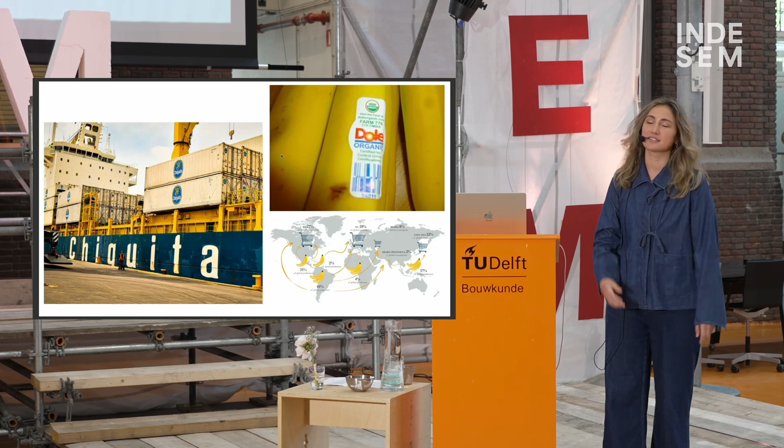Do you agree with me that it's better to buy local food? Yes? Why? Can you throw out some ideas why you would buy a fruit that is in season and grown locally rather than bananas that fly in or are on a ship from the other side of the world? Logistics? Yes. Reduce transport? Yes. That could be. What? Local labor and supporting the local economy? Very good. So I completely agree with you guys.

Then why don't we do the same with construction materials? Why, when we go to Brico to buy a paint for a room, we never think about where it's coming from, or there's no tag, there's no nutritional properties, let's say, as we would find on food to know what's inside, and we actually have no clue where it's coming from. So this is exactly the kind of questions that I was asking myself when I was studying here. And this is what we reflect a lot on at BC.

So what is BC? It stands for Brussels Cooperation, and it's actually a hybrid company made out of 3 different companies. So we have BC Materials, which is a workers' cooperative. It's literally a company that produces construction site materials and sells them on the market. Then we have BC Studies, which is a non-profit research laboratory.

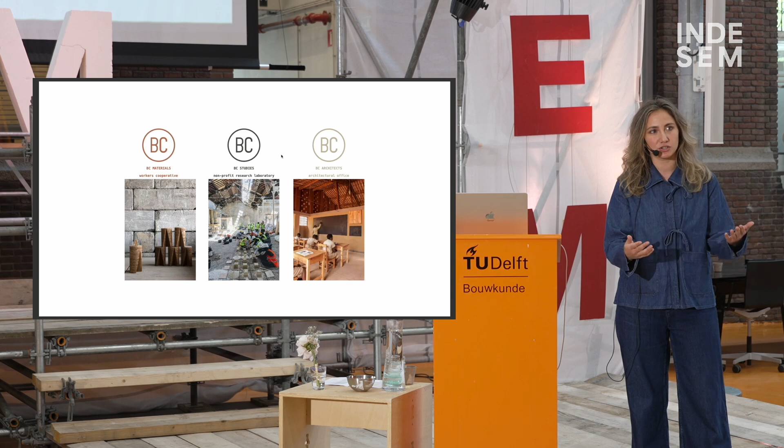I'm actually here today with BC Studies, let's call it, because I'm doing education or workshops regarding the world of earth construction. And then we have BC Architects, which is a proper architectural office. We all work in the same space, we all work together, but they have very distinct objectives.

How did BC start? So 4 co-founders in Brussels at KU Leuven got a commission from someone that they knew to build a school in Muyinga in Burundi. You probably have seen this project before. They actually traveled there, they didn't have a job, and they started checking out what was possible with the resources that were there, because the budget was quite low, and they needed to produce the materials right there on site and couldn't afford to import anything from abroad.

So they started doing a lot of research and actually understood that most things over there are built with mud. They started testing it, reading online, reading books about how to transform this resource to build. And I'm going to show you guys a video that explains a bit that process.

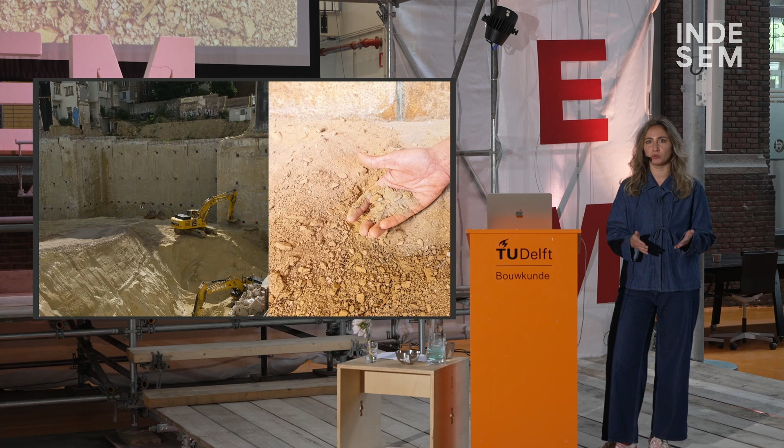And so they started thinking, since we've had this experience in Burundi with transforming the resources into construction materials, why can we not do it in Brussels too, in Europe too? So basically, this is the main idea around which BC Materials is born. It's just to take earth that is already excavated from construction sites. To give you an idea, there's 37 million tons of excavated earth that is thrown away in Belgium every single year.

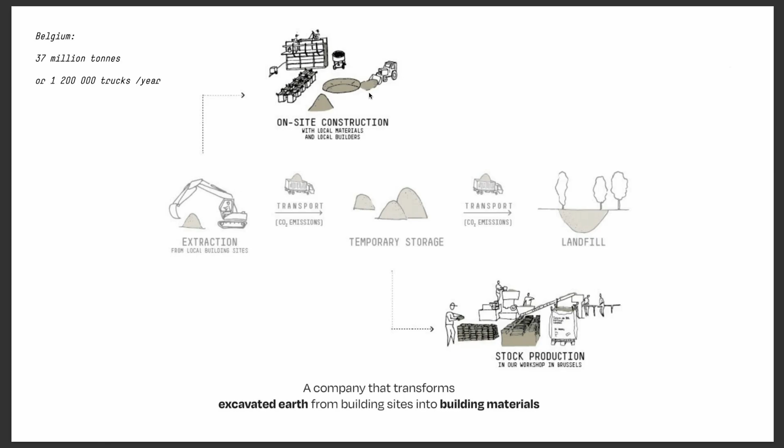And so the idea is that either when that earth is extracted, we can reuse it directly on site to transform it into a building material, or instead of going to the landfill, it's transported to BC Materials, it's placed over there, and then we have a small factory that transforms it into construction materials. This is what that small factory looks like. There are some people here, some of the students of Delft and Clay over there, who have been there to actually do workshops. It's organized in a way where big trucks just drive by and they unload all of the different resources that are excavated.

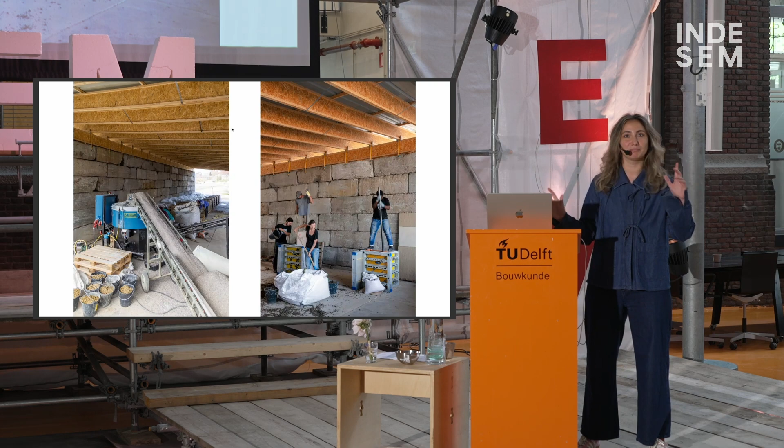This is what it looks like inside. It's also a temporary construction, pavilion-like architecture, because the idea is that we have a temporary permit to actually produce materials over there, so the whole structure can be dismounted and transported somewhere else.

And these are the 3 main products that BC Materials produces. I've brought some samples for you guys over there. So there are the plasters. You can see the plaster boards. There's base plasters, finished plasters, and paints. We're going to talk about that later because we're going to have a workshop on that.

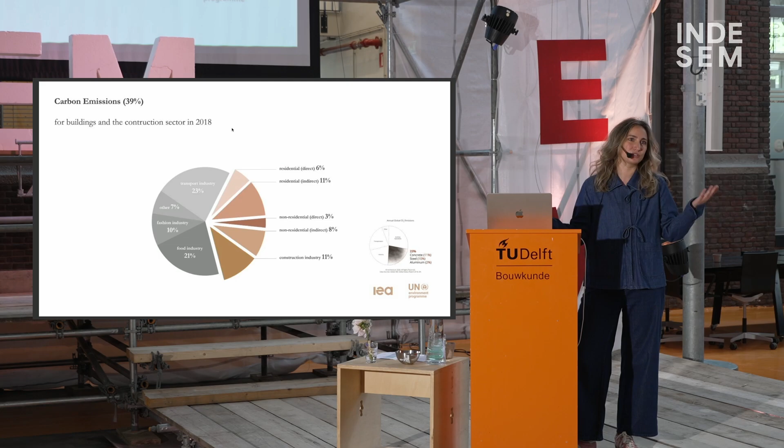There are rammed earth samples and compressed earth bricks. You can go and touch them and interact with them. And so these 3 groups of materials are sold on the market. Why is this relevant? I think we all know this, but the construction industry accounts for a huge amount of carbon emissions globally. So we really have to do something different about the way we build.

So the 2 main challenges of this project are, first, not to use concrete. We have a very, very limited amount of cement on site, only when it was really necessary, and we don't have any concrete in the foundations, for example. And we are not working with a general contractor. So the idea was also to invest in the local economy, as we've mentioned before, to really invest some money in craftsmanship and not have a big contractor managing non-specialized contractors and artisans.

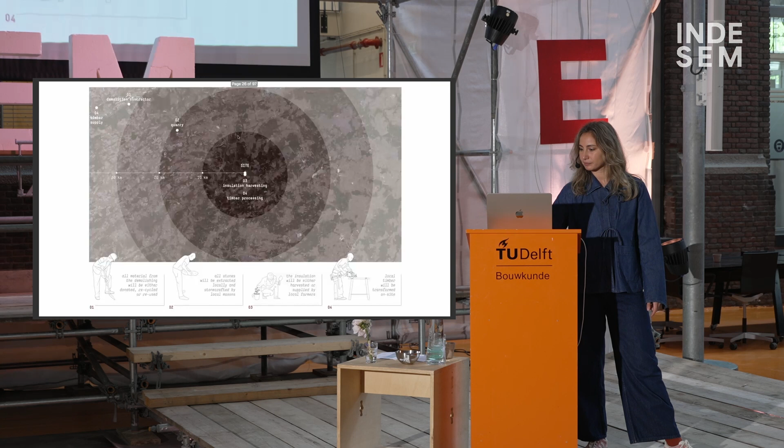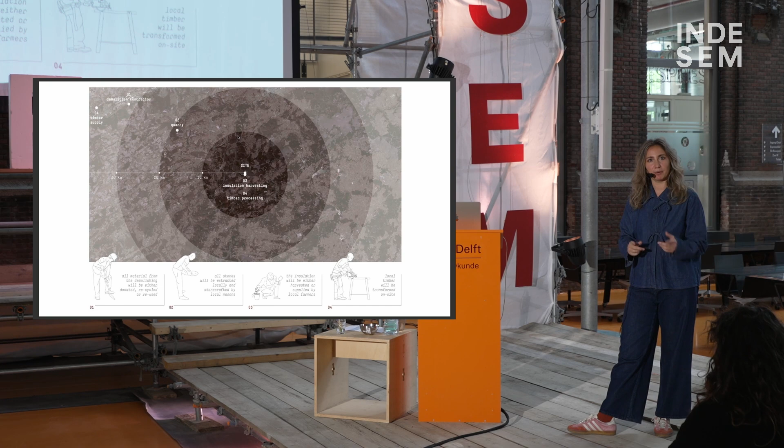And the main interesting thing about the approach to actually building this building is the map that we made to decide what materials we were going to use to build it. So we set a radius of around 50 kilometers around the construction site. And we took a lot of months of research to really map every quarry, every extraction place, every transformation facility, everywhere they would have sawmills or produce any kind of materials, and also agricultural activity, to know whether we could do something with the agricultural waste.

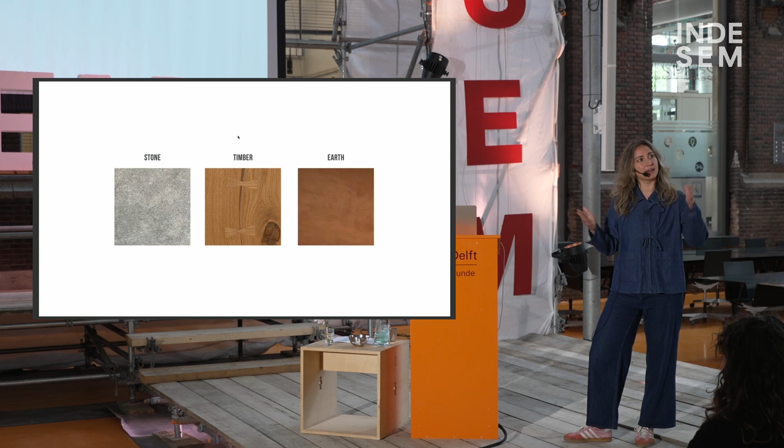And we arrived at the conclusion that the three families of local materials we could work with were stone, timber, and earth. And I'm going to take you a bit through these three materials and how we've transformed them on site. We'll start with stone. The three cores of the construction are 4-story structures built out of stone.

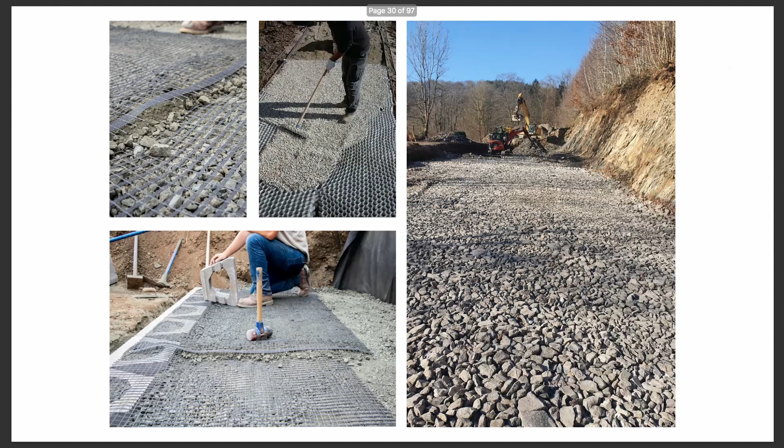But first of all, let's start from the foundation. So I've mentioned that there's no concrete in the foundations, which is quite crazy. There's not a lot of buildings that are built nowadays without concrete in the foundations. So how did we do it?

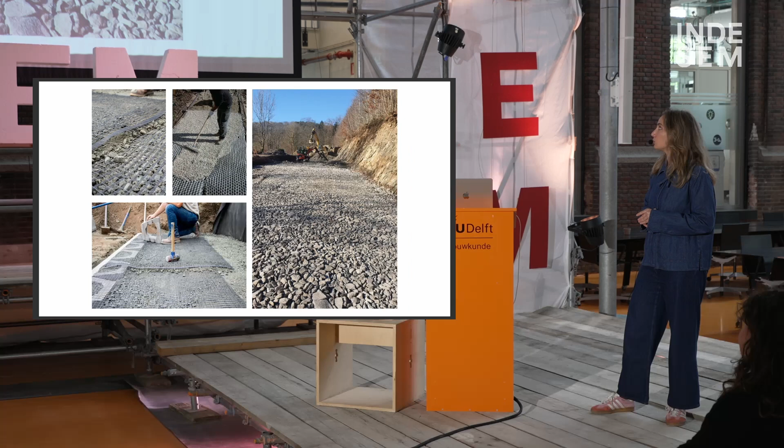Basically, with an engineer whom we collaborated with, we observed how streets and infrastructure is built. And it's built by using compacted gravel, as you can see from the picture. So the picture to the right is actually the construction site.

We basically excavated on site until the bedrock layer that was existing there, and then we started filling up with gravel in geogrids, they're called. They're these kind of nets. They can be made out of different materials, but they are kind of like bags that collect all of the compacted gravel and keep it in place. So these sandwiches of gravel until the actual level of the construction.

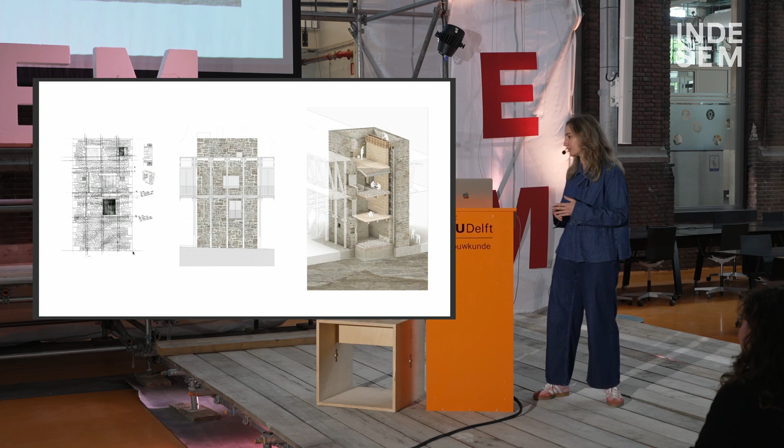And so they are built with kind of the vernacular ways of also creating spans and openings in the facade. We had openings that couldn't be wider than 1.5 meters, because otherwise we wouldn't be able to produce the lintels in stone that would actually support the masonry.

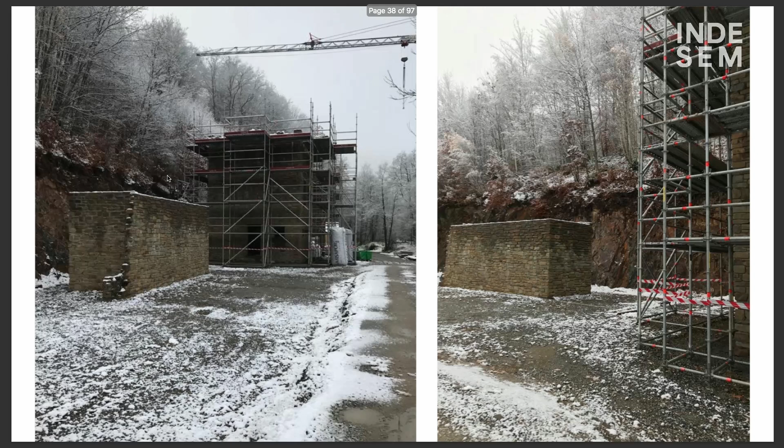Also, building with a mortar that is not cement-based, we had to arrange the construction site around a very specific planning, which is something that we are not used to anymore as builders or architects, because lime freezes in buckets. So when the temperature gets close to 0, there's no way we can work on the construction site.

These are pictures that I took in December of 3 years ago. It was freezing outside, and the craftsmen were like, we're not gonna go to work because there's no way we can continue to build. And so we had to interrupt the construction site between December and February and plan around what they could do throughout the time, because it was a huge hole in their planning.

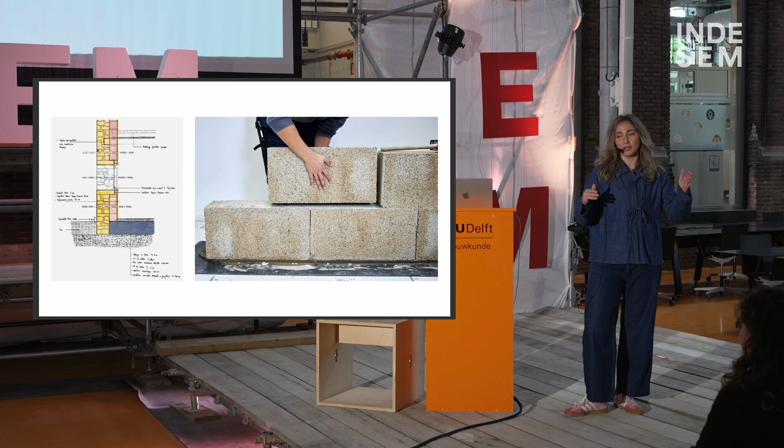Here you can see a detail of a lintel in stone, and then the arches to kind of help the lintels take the load of the whole construction, because it's a load-bearing stone wall, which is insulated. So here on the left, you can see a kind of technical detail. In yellow, we have a 50 centimeters thick wall, which is then insulated with another 30 centimeters of hempcrete.

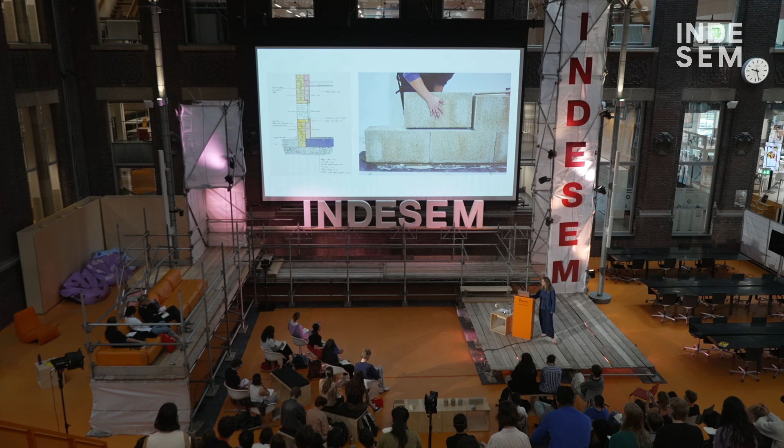And on the ground, so here, if you can see my mouse on the screen, is the compacted gravel that I was talking about. And then we needed another layer of insulation for all of the water and humidity coming from the ground. It's this one in blue.

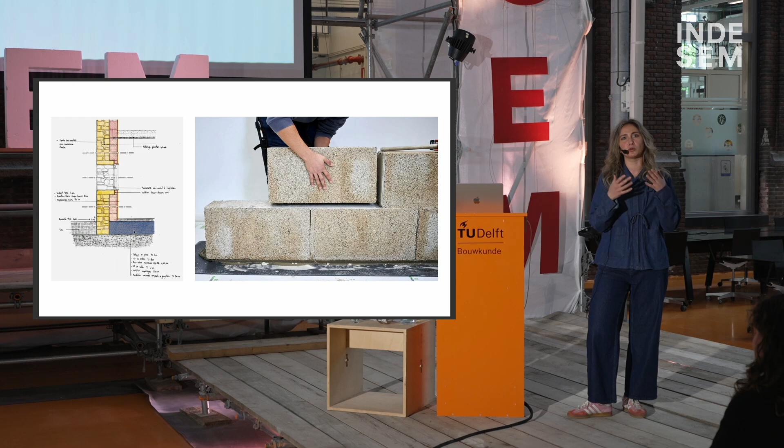And we actually used some seashells. They're actually taken from The Hague, from the canals in The Hague, because sometimes they just empty them to clean them from the shells. And they were also thrown away. So there is a company now that is recuperating them, washing them, and we can use them for insulation.

And this is another picture during the construction of the access to the house via this stone bridge. Also in the interiors, we have some stone. This was a render that I made really far back to show what the interiors would look like. We also started developing an idea to create a new product with the quarry, because they had saws and they had these very beautiful big stones, but they wouldn't cut them for finishing. So for the first time, we did that.

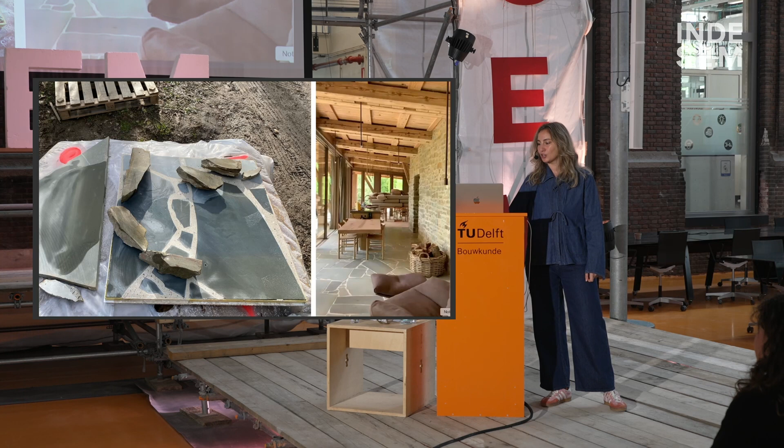So this is a picture from an interior space in the middle of the construction site. And these are some tests to actually polish and use waste pieces of cut stones, very thinly sliced, for the finishing floor. So here you can see a picture of what it looks like at the end.

Then we go to timber, which is the second important material of the project. It creates this portico that is elevated from the ground, as I explained earlier. But in order to study this wooden construction, we really wanted it to be dismountable and to be bolted, so that one day when the building has to be dismounted, it would be very easy to actually unscrew the bolts and reuse all of the wooden elements.

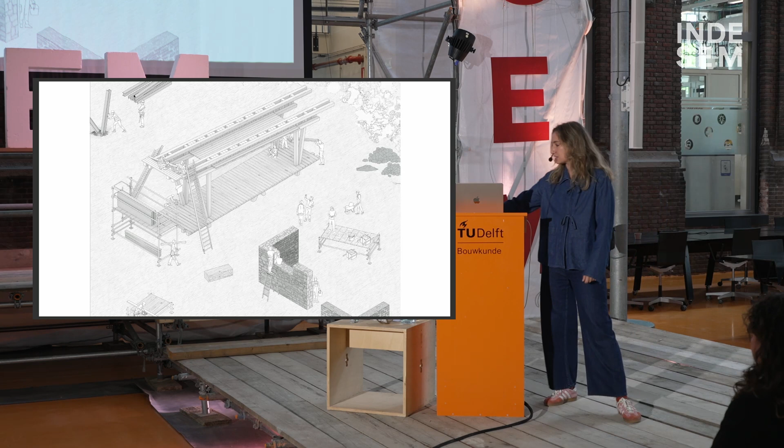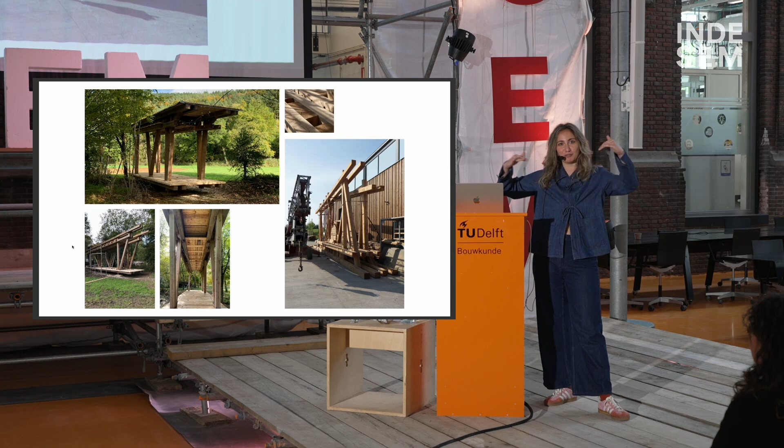In order to do that, we created a one-to-one prototype, which is a typical way of working at BC. We build things one-to-one, we observe how they behave, and then we actually apply them on construction site. This is a picture of us building that prototype. It was actually a very good exercise because these beams on top completely distorted. If you go to see the prototype now, they're completely bent. And so with the engineers, we studied solutions on the prototype for it not to happen in the final building.

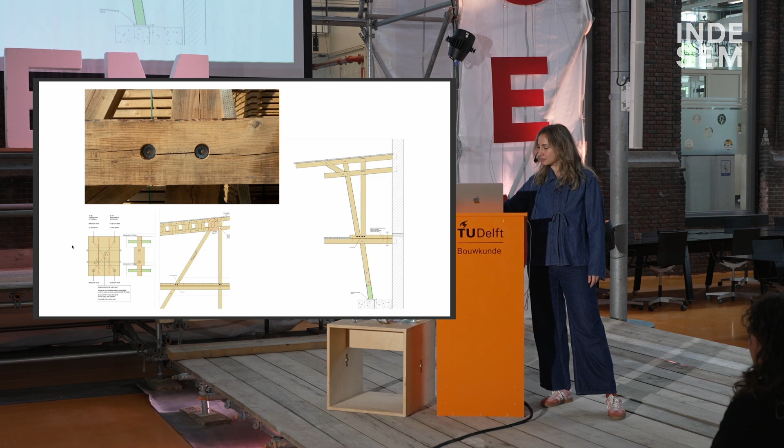These are some images of the bolted connections. And this is a bit the way in which the wooden part of the construction was built. So these ones that you can see here in the pictures are prefabricated cement dalles, we call them in French. So they're prefabricated elements that are just sitting in the compacted gravel foundations and anchoring these wooden elements to the foundations. And this is one of the only moments in which we actually did use cement. It was necessary. Then they built the porticos at 90 degrees and they lifted them up in position.

Also a picture of the construction site. This is what it felt like the first time that I walked in between these porticos. And this is a very special moment because it was the end of the timber construction site, right when nature was starting to take over the site again. This is what it looked like in the winter.

You can see, I didn't explain how the house works, but basically, this is the main floor of the house. You can see that it's glazed in between the timber elements. There's all of the wet spaces in the stone towers and all of the more social spaces or bedrooms inside of this wooden boat.

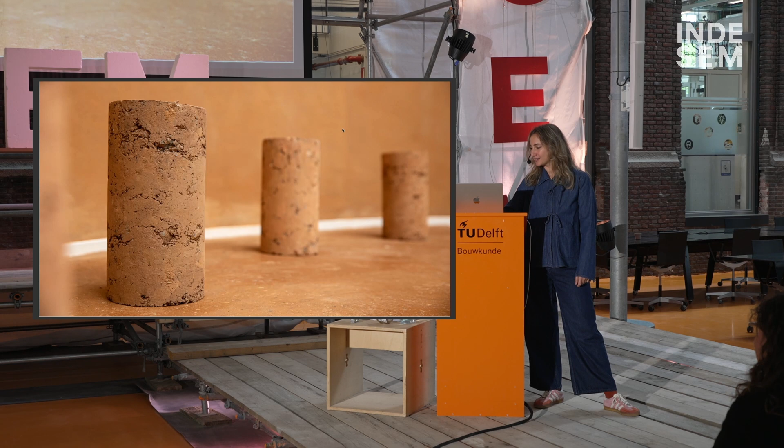These are some samples of the rammed earth that we did together. We did some testing to understand if this wall could actually stand up. These are, again, some samples. You can find them also over there. These are samples that we did for an exhibition to test earth plasters made out of waste and a rammed earth floor.

So these are samples of earth plaster that we made with different waste resources and ingredients, and all of them are possible. They are just different possibilities with different mixes, different resources that we made to choose what the interiors of the house were gonna look like. Do you guys know what an earth plaster is? Or what a plaster is? No? Someone?

No? Okay, so in a buildup of the wall, it's usually the last layer of the wall. It protects what is structural inside of the wall. Historically, it was made out of what was available in a certain environment, often clay or lime for renders for exteriors. And do you have any clue what an earth plaster is made of? What the ingredients are? Yeah. What? Marble?

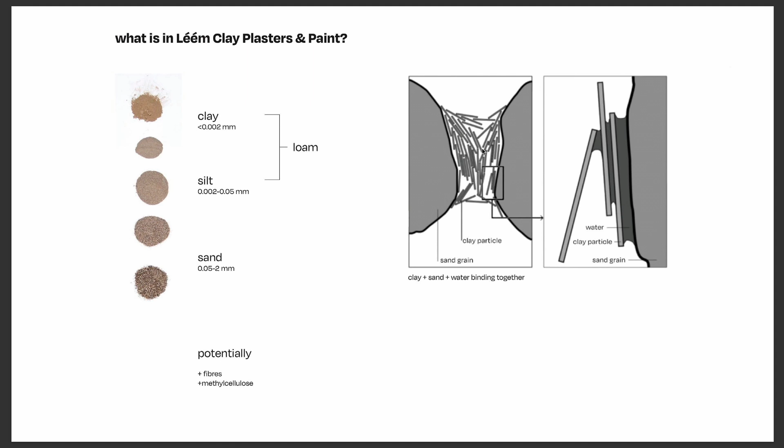We all had the experience as kids to build a sand castle. And we know that when sand is wet, we can build a nice castle on the beach. But once the water content is out, the kind of binding between these particles falls apart. And so the sand castle falls back to pieces.

Clay works very differently. Clay is a binder, and it works a bit in the same way as dishes do when you take them out of the dishwasher and you put them on top of each other. There's a small layer of water, and they tend to stick to each other. You cannot take them apart anymore. Sometimes it also happens with glasses. And so when water goes in between two plates, these two plates start sticking to each other.

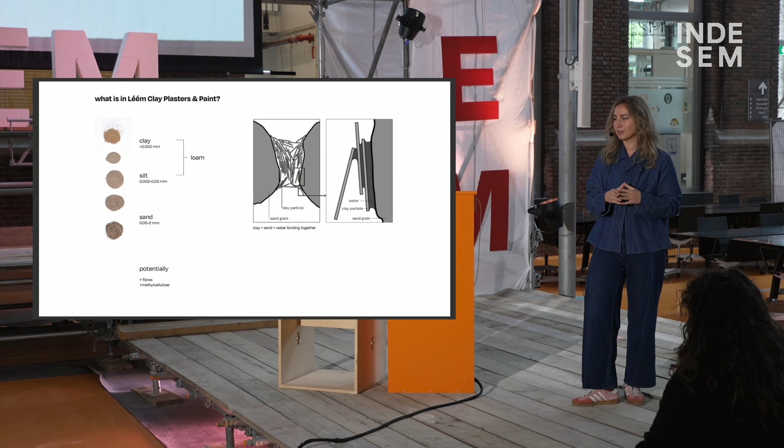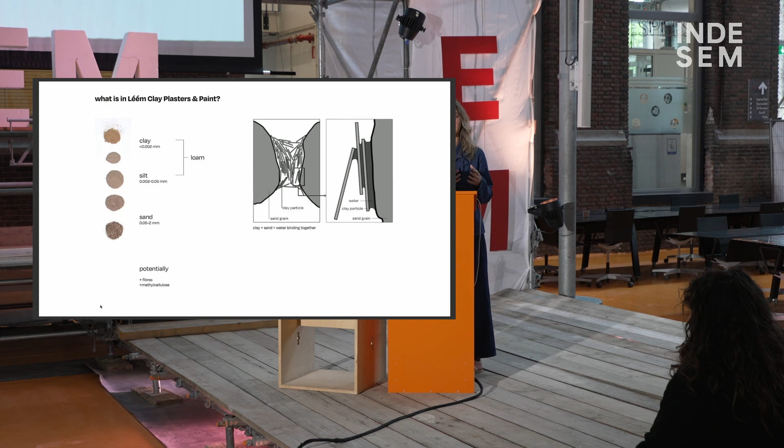And this is why we consider clay the glue of an earth plaster, and why we consider sand the structure of an earth plaster. So we need a mix of both to be able to do an earth plaster. Potentially, we can also use fibers and different kinds of materials to give different properties to our plasters.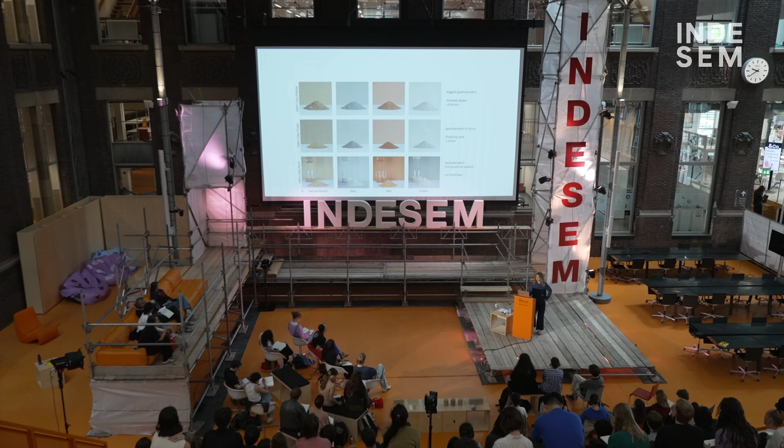These are some pictures of the actual products that we produce at Léém. So on the top, you see the ones with the biggest granulometry. They are base plasters. Then we have finish plasters, which are finer. And we also started producing paints that you apply with a brush that are also based on the same resources.

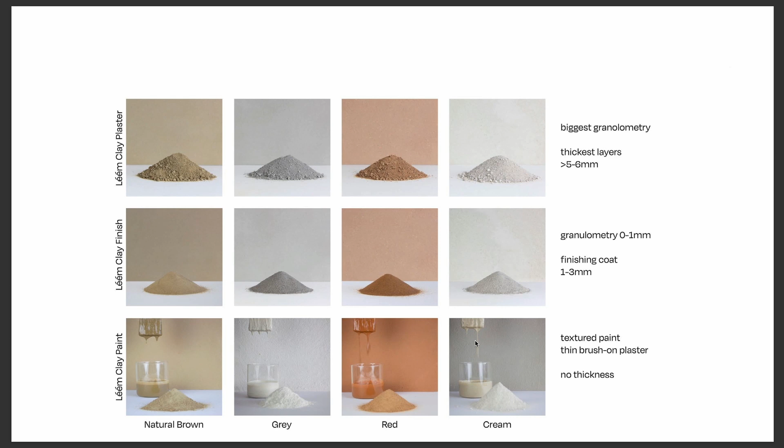In order to explain to people what they feel like, what they look like, and for them to touch them, we make samples. So you can see them over there. You can see the different colors. And yeah, if you want, you can also pass them around. And these are very useful also to do testing, to understand the behavior of a certain recipe that we want to test. And it's also what we're going to do later today together during the workshop.

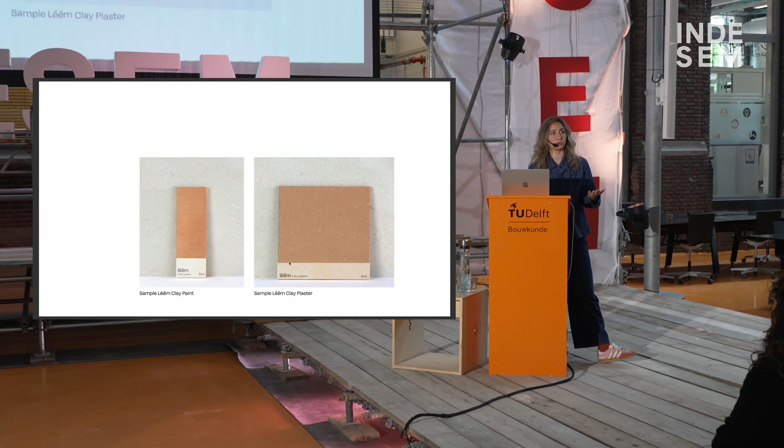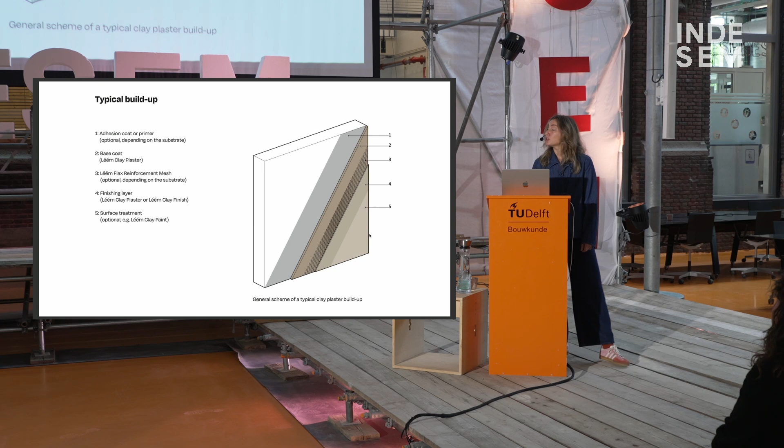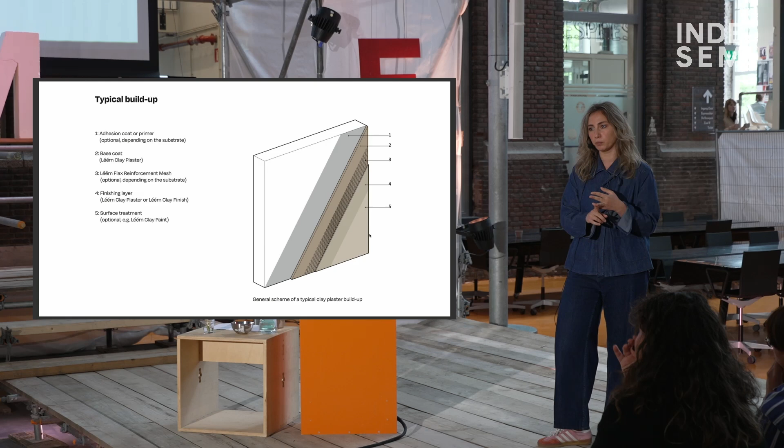We then need, and I'm going to show you a picture later, sometimes reinforcement mesh. These are nets that we use to allow the plaster to be flexible, especially when we have doors or lintels or openings, so that it doesn't crack. Then we generally apply a finishing plaster, and then we do surface treatment.

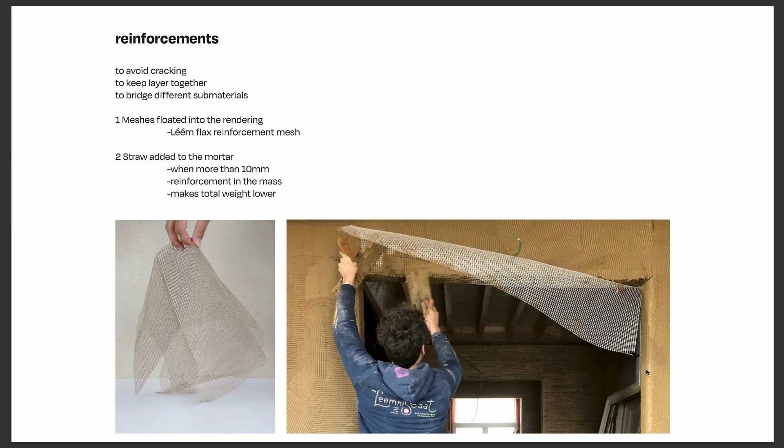So on a construction site, this is the way that an earth plaster is going to look. It's going to be mixed in big quantities. We're going to apply the base. As you can see here, there's a very rough base. These are the meshes that I was talking to you about. They are used, for example, here there is an opening, and so we need to give the material more flexibility so that it can move freely. This can be made out of different materials. The one that we also started producing at Léém is made out of flax natural fibers.

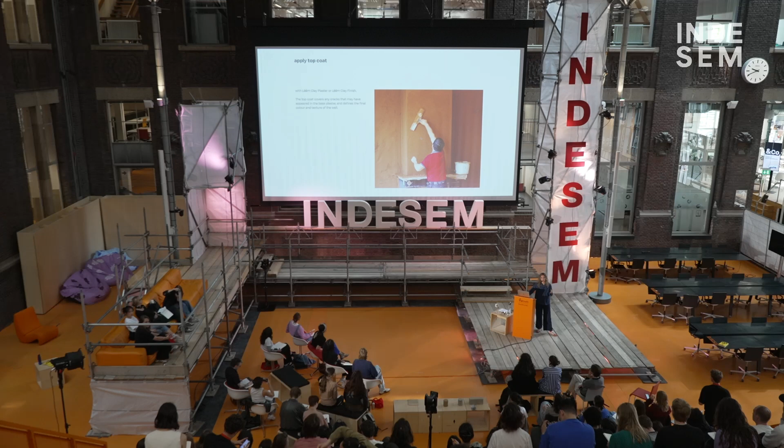We let the plaster dry, and then we apply our top coat, which is generally thinner than the base coat, and it's what we're going to see in our rooms. And it's also what we're going to produce today together, a finish coat that is much, much thinner. At the end, when the plaster starts drying, we treat it with a sponge to remove the top dust particles and to really smoothen the surface.

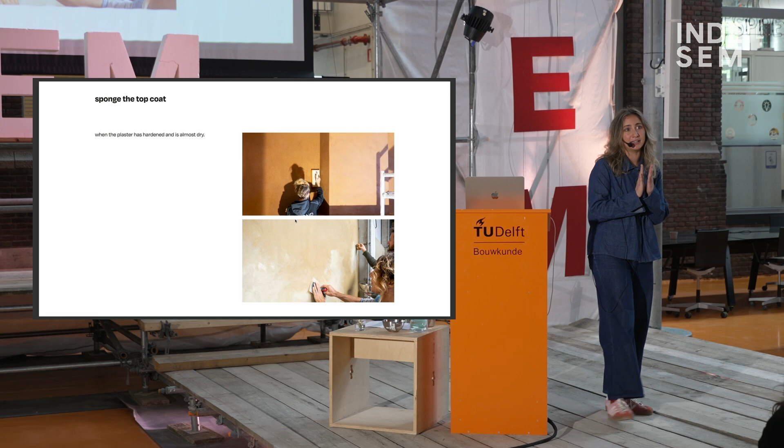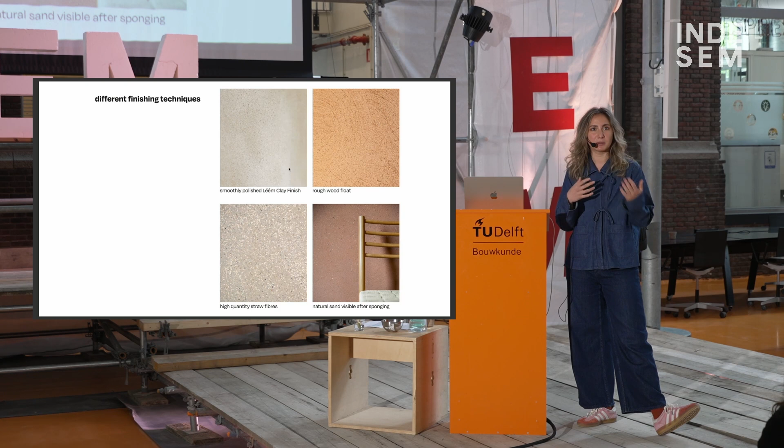And this whole build-up or material starts to really have beneficial properties in a room because it has a hygrometrical ability. So it's able to absorb humidity and water and release it into the environment when the air is very dry. But it's also a material that, of course, can have different colors depending on the resources that we're using.

But we can also fix it constantly. So if there is a crack or if we break a part of it, we can just re-wet it and correct the mistake by just reapplying the material.

And the other thing is that because we are not changing the physical properties of the material, we're not baking it, we are not doing anything to it, that is really earth on a wall. So if we want to take out that plaster, we can just scrape it off, and it's just sand and clay that we can either throw in a garden or reuse for something else.

So now let's start to discuss a bit the workshop and how we're gonna do it. The objective that you guys have today is to tell us in a group what you think is the recipe of an earth plaster. So I gave you the main info about what is in the mix. You're gonna have the resources and touch them with your hands. You're gonna make different recipes, and then this afternoon with your group you're gonna tell us, we think that if we were to sell this material, we would actually go for this recipe. So you're starting your own material production company.

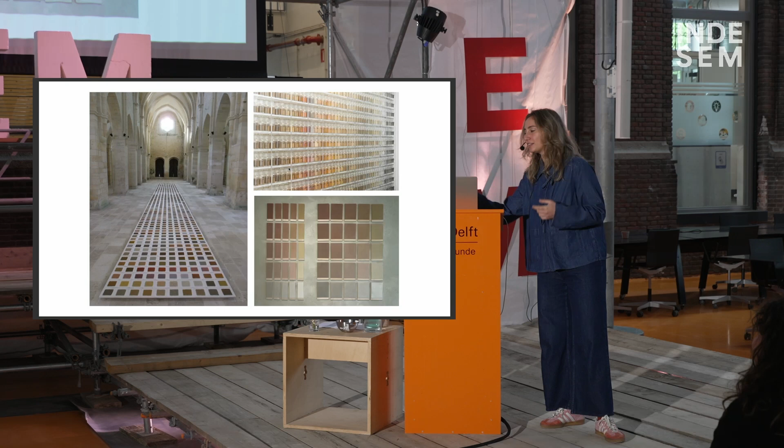And at the end of the day, the idea is to have a lot of different samples that we can compare between each other. They're gonna have different properties, different colors, different resources. And we're gonna have them all in an exhibition.

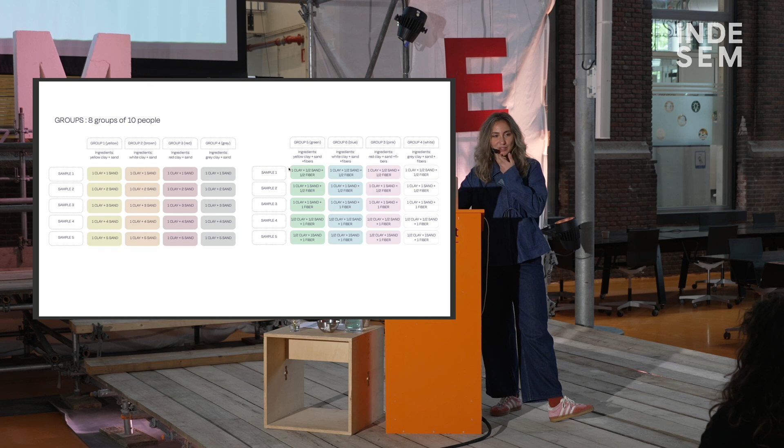So how is this gonna work? You guys are 80 people. We're gonna divide you in 8 groups of 10 people. They're divided by color. And each group needs to make 5 different recipes. You can also keep experimenting if you're done early. You can really play today. It's a space to play with the resources.

So for example, if we take the yellow group, their ingredients are yellow clay and sand. And they're gonna make 5 samples. The first one has a recipe 1 part clay to 1 part sand, all the way to 1 part clay, 5 parts sand. We work with volume, not with weight. So you're gonna have cups to measure resources, and you're gonna divide a certain volume to respect this recipe. It's a bit like cooking, so take it in this way. If you mess up, there's no problem, because we can just throw away the material on the ground.

If we zoom into the yellow group again, you're gonna work in couples. So 2 of you are gonna work on a specific recipe. And the idea is that you produce one final beautiful sample that is gonna be part of our exhibition and that we're gonna compare.

As a group of 10 people, you're gonna have some tools. So you're gonna have a bucket of water, different trowels that you can use, sponge. And then for every couple, you're gonna have a mixing bowl, a measuring cup, a spoon to mix in your bowl, trowel, and 2 tablets. We're going to show you outside that there are 2 tablets prepared per couple.

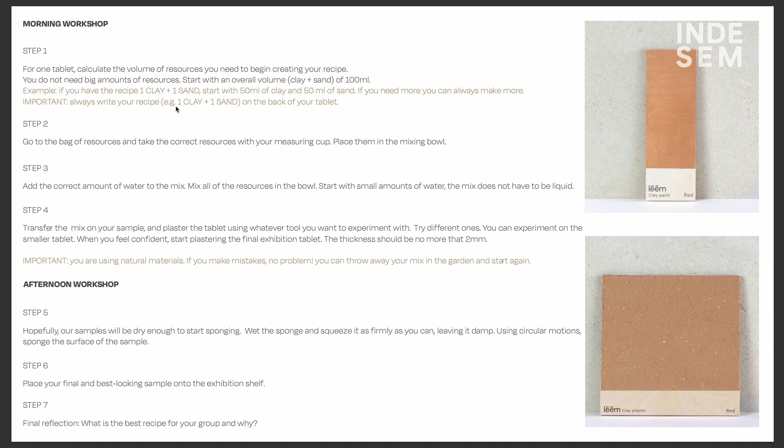It's quite straightforward. It's important that whenever you work on a tablet today, that you always write your recipe on the back. So we have some paper tape and pens. You just note your recipe, because at the end of the day, we're going to have 40 final samples. And when we want to compare them, we always want to be able to turn them and read what you actually did, because you think you're not going to forget, but you are going to forget for sure.

Then you can go to the bag of resources. So outside, we've prepared some big bags. You can read what's in them. And with your ingredients on the previous page, you're going to find your ingredients outside. So you just go to take the actual ingredients you're going to use.

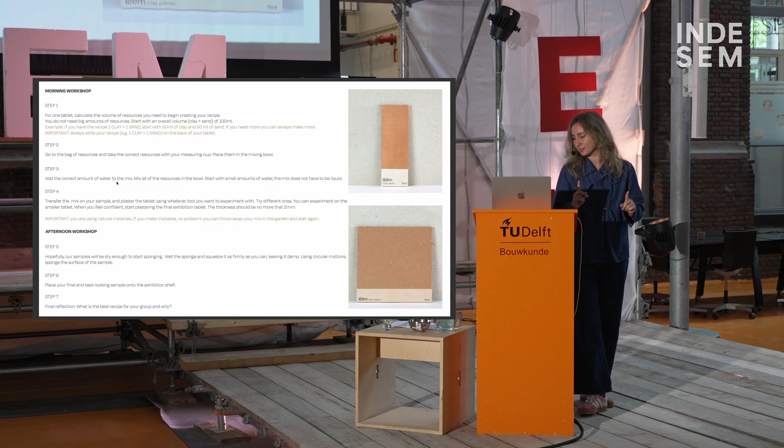You add the correct amount of water to the mix. So this is really important. And I've prepared a mix that I want to pass around now so that you can touch or see it, and you know how much water you're actually going to need to put in. I'm going to start here, and you can pass it around. So it's not very wet. It's not a lot of water. If you mess up and you put too much water in it, no problem. You just add other resources to give it a good texture.

Then you transfer this on your sample, and you start working with the material. You're going to have different kinds of trowels. You have painter tools, you have plastic trowels, you have real construction site trowels. So just test them, experiment, see what you feel comfortable with, and you start playing with the material.

It's important that you respect a thickness of around 2 millimeters. We actually want our samples to dry today, so that in the afternoon we can sponge them and they can be exhibited. So if you work with much thicker plasters, they're not going to dry in time. So try to stick to 2 millimeters.

And then this afternoon, we're going to sponge them. We are going to start our exhibition, and every group is going to present what they think the right recipe is. We're going to have a final reflection about what we did today. Is that okay for you? Is it clear? Yeah?

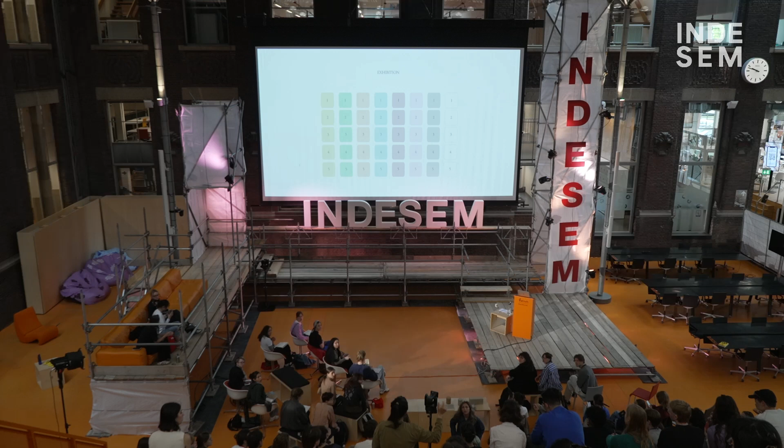Water. You just have to observe what I did and try to reproduce it. So I'm not going to give you the amount of water. It doesn't have to be liquid. You'll see when you touch that bowl. I don't know where it is now. But when you touch it, you're going to feel the material, and you're just going to work with your hands until you reproduce something that is more or less similar.

So there are no pigments that we're going to use today. We're just going to use clay, which is actually a pigment. It has color characteristics. So I didn't mention this, but in every earth product, what gives the color to the material is the color of the clay. So we're all going to use sand that is excavated from Brussels. It's a yellow sand. This is not going to change the color of what we do at all. It's just our clay. So we're going to have red, yellow, white, and gray clay. And each group is going to focus on a color, and that's how it's going to go. So there's no additional pigments in the mix.

Exactly, yeah. They're all natural. Three of them are from Belgium, and one of them is from Germany, of the ones that we have today.